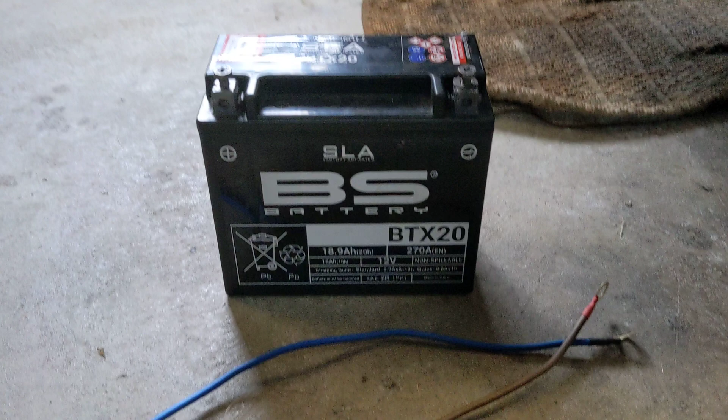Now I've just been messing around with batteries. This is the battery off the big red Guzzi Lorenzo and it's 270 cold cranking amps, it says on the battery somewhere. There, it says right there. And these are the wires that we were using in the previous video just to see whether or not we had any chance of starting the bike on the battery.

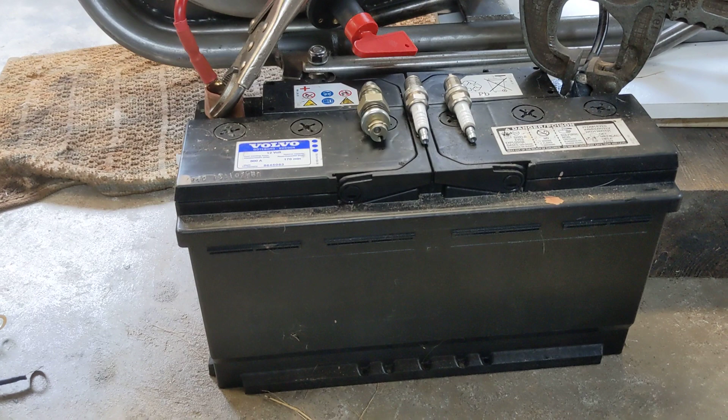And as you saw, even with a decompressor in one of the spark plug holes, the only way we would get a decent rotational speed is by taking both spark plugs out. So this morning, just for fun, I thought I would bust out the big guns and take the battery off the Volvo, which is nearly 800 cold cranking amps, just to see what would happen.

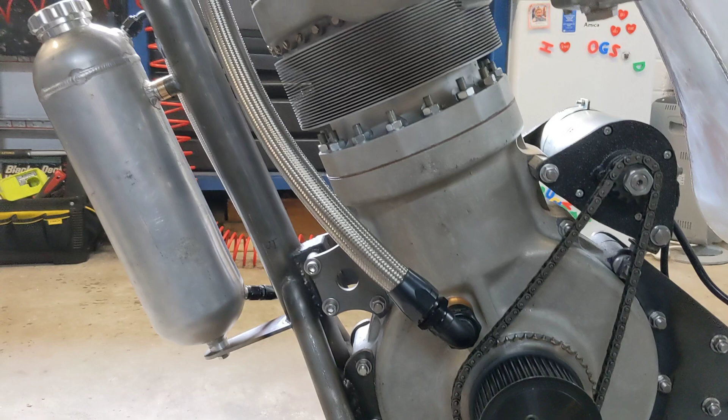I've tried it with the spark plugs in, I've tried it with one plug in and a decompressor, and I've tried it with no plugs in, and while it does turn the engine with no decompressor, it doesn't turn it quick enough. It sort of just about manages to get the lump over top dead center and then flies around the other 3 strokes and then comes up to compression and slows right down. So it wouldn't be suitable to start the bike, and the dynastart does get a little bit on the warm side but not overly hot.

So I'll just give a quick demo of the type of rotational speed we get with nearly 800 cold cranking amps. So each chuff that you hear is the compression on the air coming out of the spark plug holes. So if you multiply that by 2, you get the RPM. We've timed it, it's about 300 RPM.

So obviously this battery is too big to carry around on the bike. I don't want to have to take a trailer behind it just to tow the battery. That would be a little bit counterproductive, wouldn't it? So what I plan to do, you can get a lithium polymer battery that's just slightly smaller

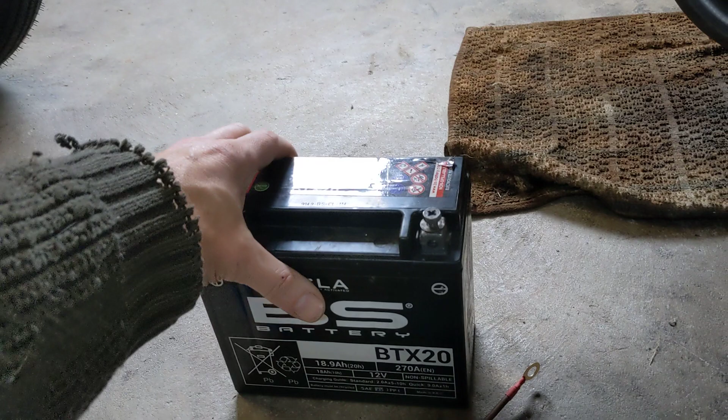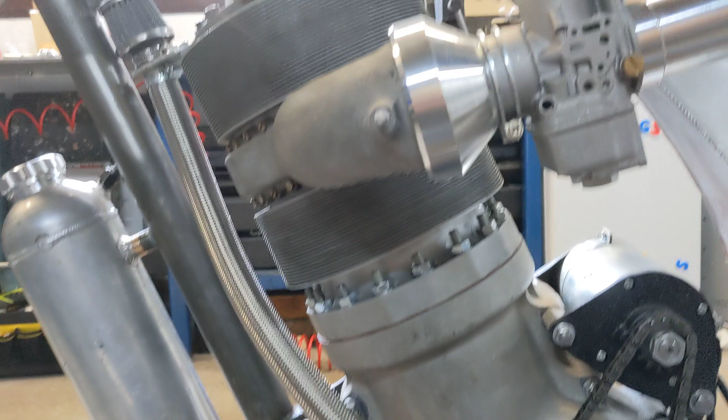than this at twice the number of cold cranking amps, 540, and I think that with a homemade decompressor in the head of at least the same surface area of 2 spark plugs, preferably slightly higher, that would allow the engine to rotate at about the same rotational speed, 300 RPM. Let it accumulate speed, and at the right moment in the cycle, drop the decompressor. The flywheels will carry it over top dead center because they're 50 kilograms, and that should give us the right rotational speed and energy to start the bike.

So that's the plan. Now, fitting a decompressor into an existing head isn't as straightforward as you might think. It's been drawn up on the board by Mr. Bob, so I'm going to pop next door, see if he's in, and if he is in, we'll have a look at the drawing board. Stand by and I'll teleport myself there. Oof, here we go, back to the drawing board. Oh, there's me. Hello, nice to see you.

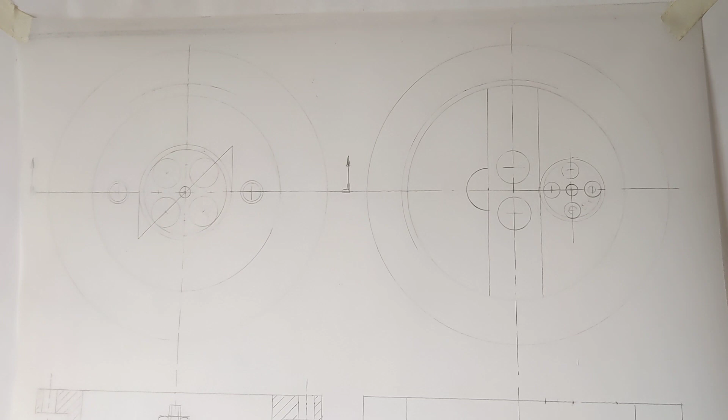So back to the drawing board, and you can see here where Bob's drawn up 2 things. So we've got a drawing looking down the top of the existing cylinder head. You can see where the 2 spark plug holes are and where we intend to fit our decompressor. So there would be 4 holes drilled into the cylinder head to allow the mixture to escape, and the central hole is effectively a valve guide.

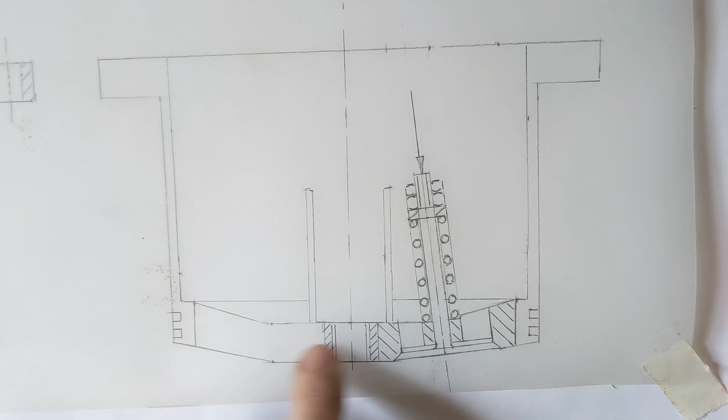And then looking side on, this is the side profile of the head. You can see that the valve comes in at a slight angle. We wouldn't use an automotive valve, we'd just make our own, cut a seat at 45 degrees, and you can see how much metal is in there around to support the valve. You've got to remember that there is no hot gas escaping past here.

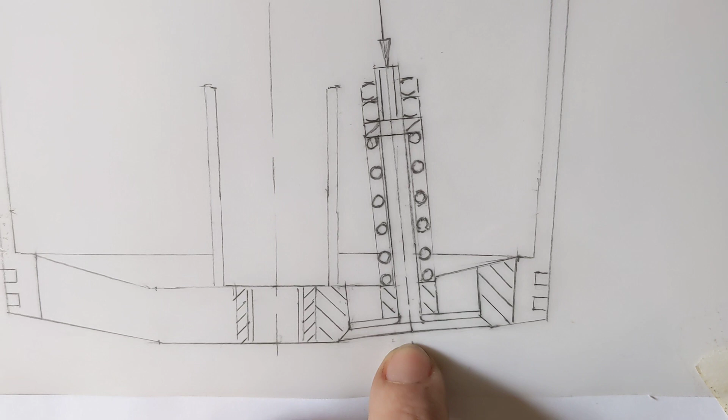This isn't a conventional valve like in a poppet valve engine. It's open when the engine hasn't fired. It snaps shut and then the engine does fire, and it remains shut all the time. So it's not quite the same as a standard valve. So it doesn't quite need to be the same resistance to hot exhaust gas, that type of thing.

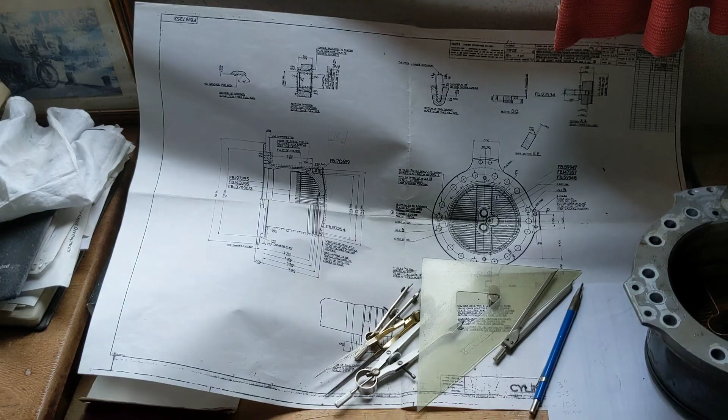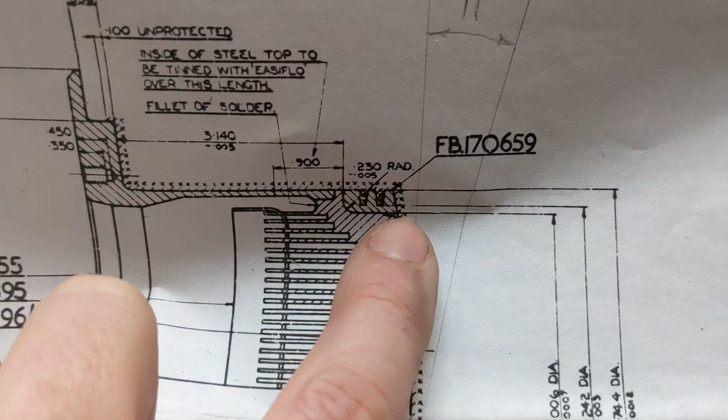Now there is a problem, however, because we have over here the original Bristol Aircraft Company drawings of their cylinder head, and as it transpires, the cylinder head, looking at the side profile, isn't one piece. So the bottom piece of it is an interference press fit into the side piece. It's not particularly clear on this drawing. That means we can't come too close to this edge here where you can see the bottom half of the head is pressed onto the sides. So that limits how close we can come to this wall here.

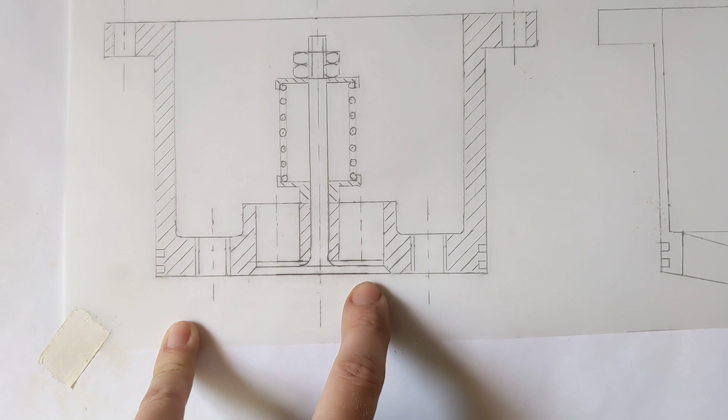So what we've been thinking is that actually it's just as easy to make a new cylinder head, which is over here. And if we make the new cylinder head with a flat bottom instead of a concave bottom, it makes it easier to fit the decompressor. The decompressor can be vertical, so we don't have to cut the seat at an angle into a sloped edge, and this isn't going to encroach on the plug leads and anything like that, and it makes it easier to activate the decompressor from the top.

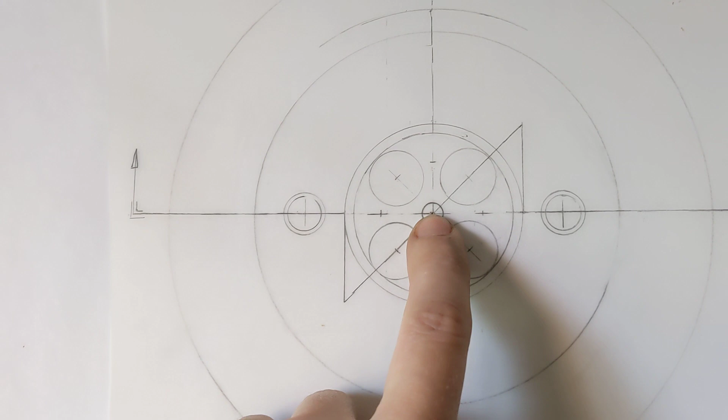So looking from the top, we would put the decompressor in the center of the head, move the spark plugs to the side of the head, and then it just makes it easier all around on a rotary table to make these 4 holes here. And if you look at the volume of decompressed, the surface area of these 4 holes compared to the surface area of the 2 spark plugs, you get much more gas escaping, so there will be no compression at all when the decompressor is open.

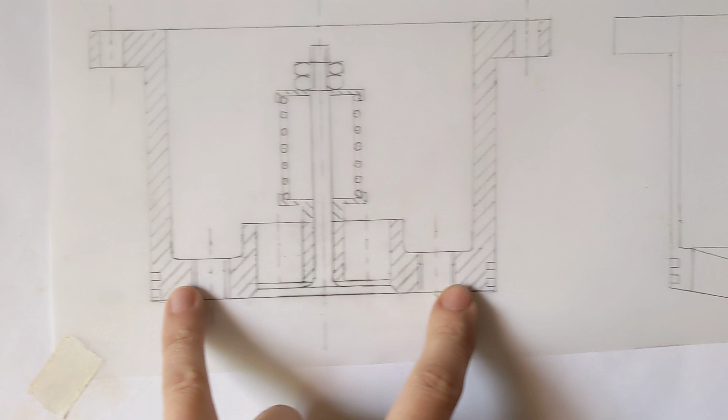So that should allow us to absolutely fly around that motor and then snap it shut quickly just at the right point in the cycle. The flywheel will take it over the top and away we go. So we have to make a cylinder head. Now, is it going to cause a problem losing a bit of compression? I don't think so, because we are at nearly 8-1, and losing this bit here, we've done the calculations, takes us to just around 7-1. It was never a high compression engine because it was supercharged.

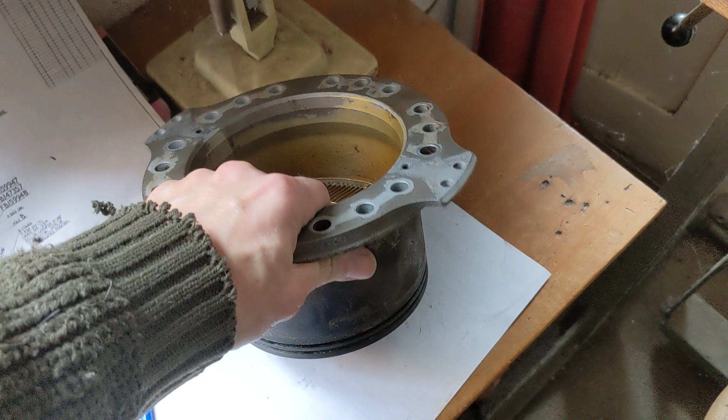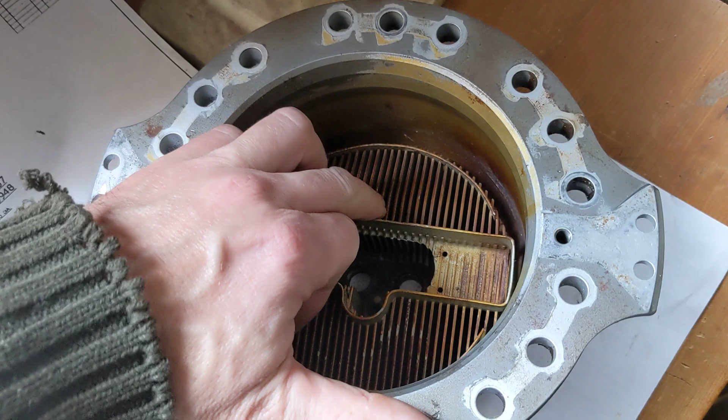I have here a head. So this is a head from the original Bristol Hercules. You can see the bottom is slightly concave, and why that presents a challenge in fitting something in. And also you've got all these cooling fins to cut around, and it would be quite a challenge to fit something in here. And because this is a working serviceable head, there's always a danger of messing it up. Making it from fresh aluminium will not be a difficult job. We can put it in the forge, or we can turn this round. It shouldn't take too long, and then drill the stud pattern in to fit the engine.

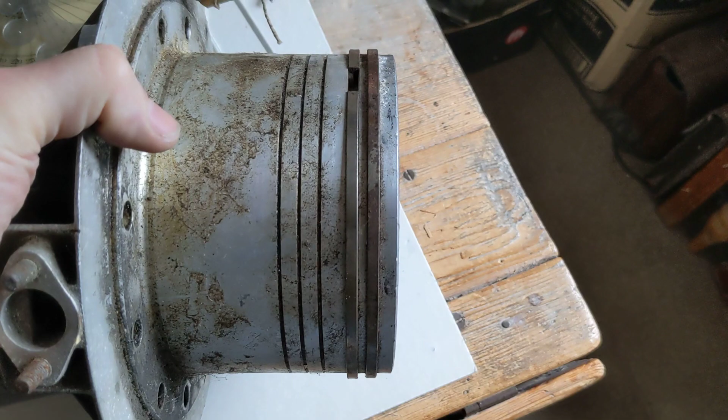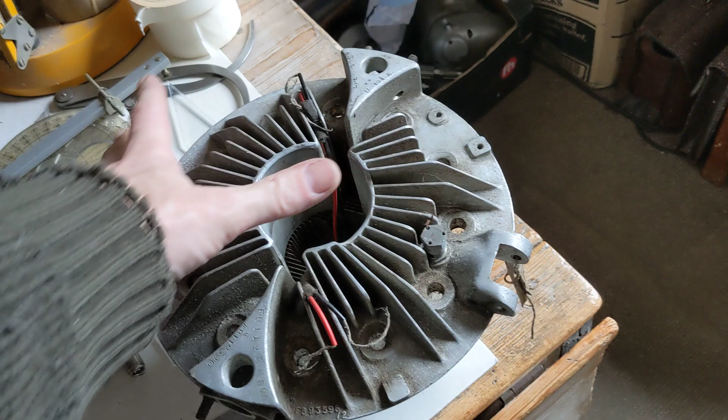The last thing I've got behind me is a cylinder head from a Centaurus, which is a later version of the aircraft engine, with an extra 4 cylinders, and you can see that's actually got a flat bottom of the head. Unfortunately, it's a different stud pattern, so it doesn't fit on the barrel of a Hercules. Otherwise we could have potentially used this head, benefited from a little better cooling, but I'm not so keen on the top of that. I like the simplicity of this head. It just makes people wonder what it's about. We probably wouldn't bother with cooling fins. We'd make it with aluminium. It means it's lighter because this is a cast item, and it's quite a weight in itself.

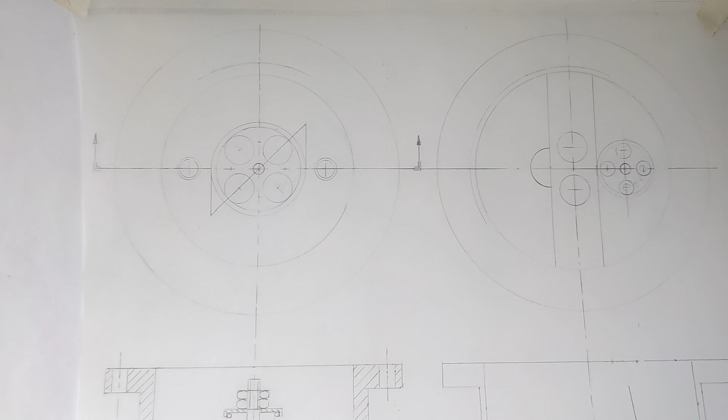So there you go, that's the plan. It does mean it takes a little bit longer because we've got to make a head, but that is okay, because it's all about making things as well as using things, and it's good to draw everything out. So we haven't cut any metal, we haven't spoilt the head, and we always knew when we started the project that we would need some kind of decompressor, so we just carry on as we were.